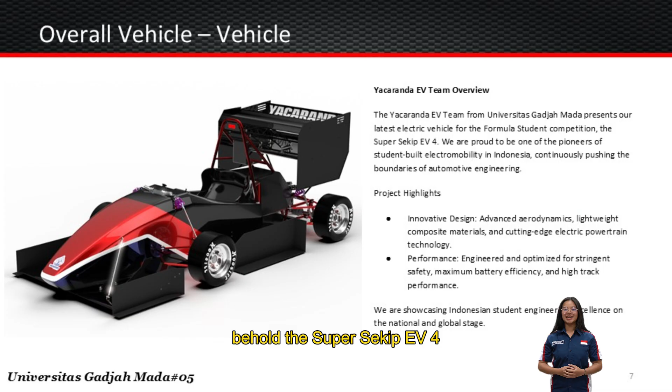Let's begin with the overall vehicle overview. Behold, the Super Sekip EV 4. Our design language prioritizes an aggressive aerodynamic profile paired with a 40 to 60 mass distribution to ensure maximum rear traction. Form strictly follows function here.

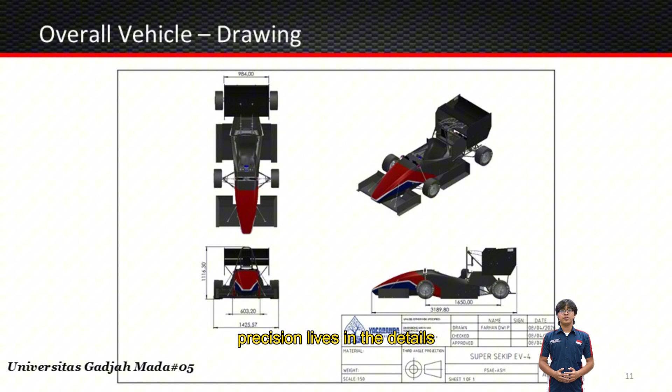Precision lives in the details. These drawings illustrate our tight packaging, achieving a 240 kg total mass with a center of gravity of just 283 mm, with balanced compactness with ease of service, essential for trackside reliability.

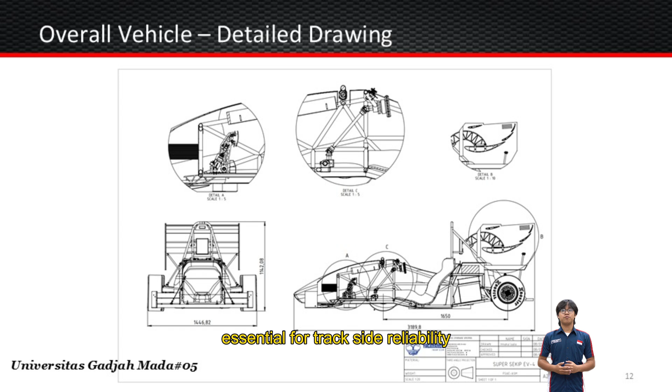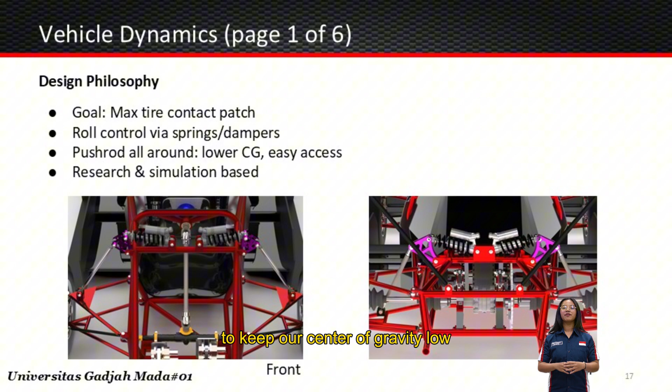In vehicle dynamics, our philosophy is simple: maintain the maximum tire contact patch at all costs. We utilize a full push rod system to keep our center of gravity low while providing easy tuning access for our engineers. Tire selection was driven by TTC data. We choose the Hoosier 16 by 7.5-10 LC0 for its rapid thermal activation. With a 1,650 mm wheelbase, we've hit the sweet spot between agility in tight slaloms and stability in high-speed corners.

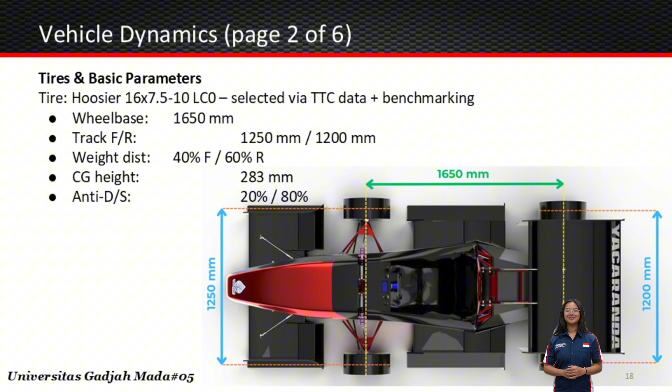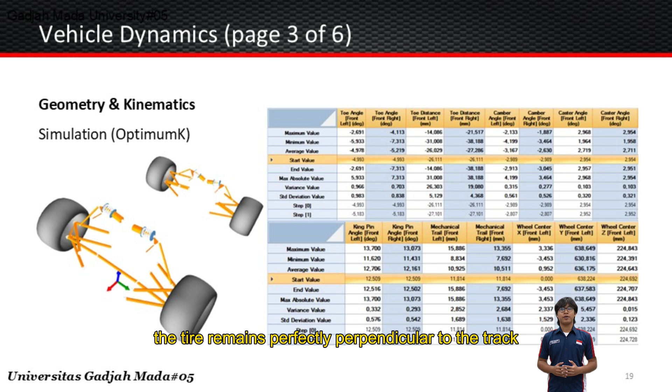Kinematics were refined through hundreds of OptimumK iterations. We achieved a minus 3.1 degree camber gain during roll, ensuring that even under extreme lateral loads, the tire remains perfectly perpendicular to the track.

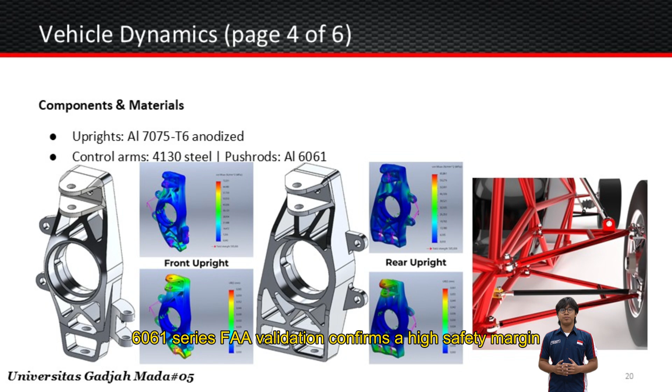For our uprights, we moved beyond standard aluminum to Al 7075-T6. This aircraft-grade alloy offers nearly double the yield strength of the 6061 series. FEA validation confirms a high safety margin even under 3G braking loads.

Suspension control is managed by DNM-RCP2S dampers. By matching our spring weight, 250 pounds in the front and 300 pounds in the rear, to our frequency targets, we've eliminated excessive pitching during aggressive transitions.

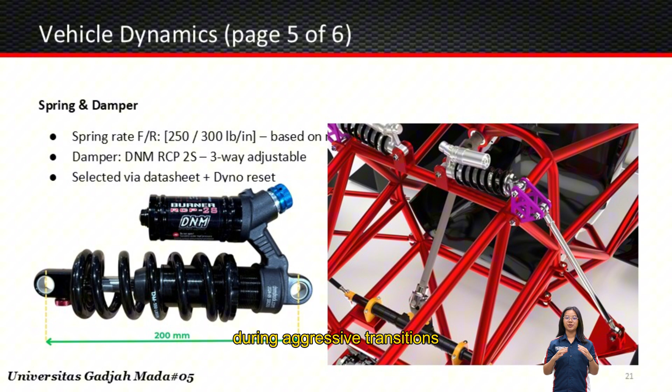Finally, the steering system. We've integrated a 2 U-joint column to prevent intrusion during impact, while the 155 mm wheel was ergonomically mapped using RULA analysis to ensure the driver remains in total control.

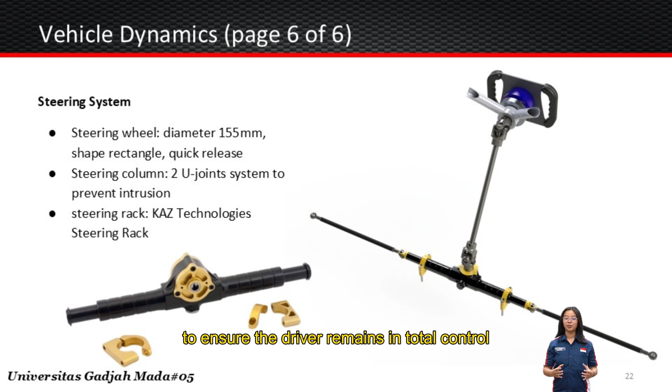The aerodynamic strategy for the EV4 is defined by 3 high-performance zones. Our front wing generates 297 newtons of downforce to ensure front end bite, while the side wings and the high-element rear wing contribute 381 and 343 newtons respectively, creating a balanced and stable platform.

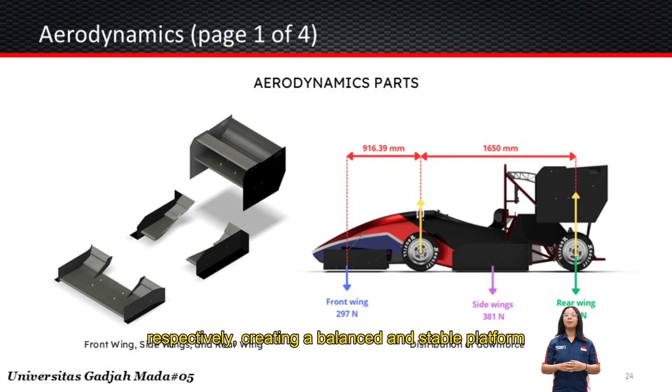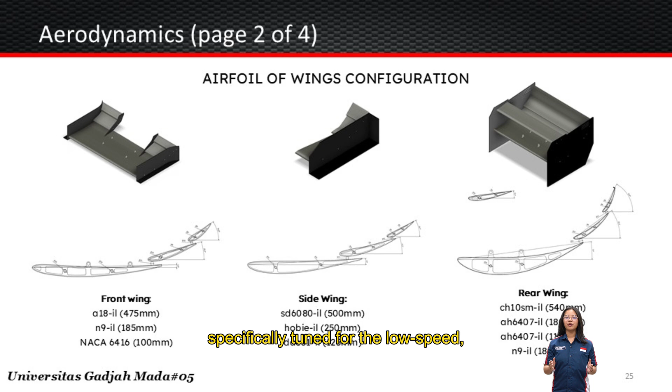For our airfoil configuration, we prioritize a proportional geometry that balances downforce with drag efficiency. By using these profiles, we achieve an optimized lift-to-drag ratio specifically tuned for the low-speed, high-chamber demands of the FSAE track. Our CFD simulations at 80 km per hour validate this design.

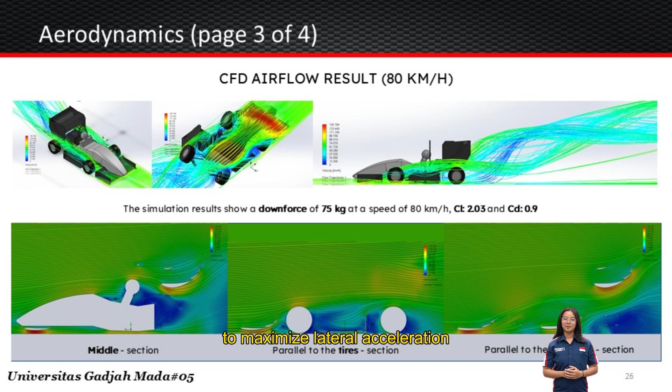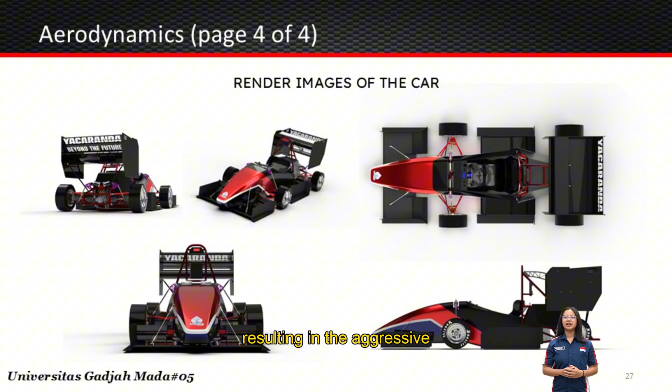Our powertrain philosophy prioritizes high power density. We selected the Emrax 228 MV motor, which delivers 75 kW of continuous power and 124 kW at peak, all within a compact 12.3 kg package. Its efficiency map is perfectly aligned with our target operating RPMs.

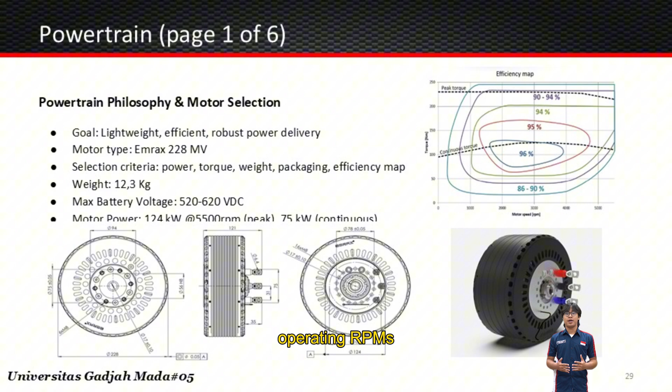To translate this torque to the ground, we utilize a 3.85 to 1 chain reduction paired with a Drexler FSAE V2 limited slip differential. The setup optimizes traction and allows the EV4 to reach a calculated top speed of 129 km per hour, ensuring we are competitive on all track layouts.

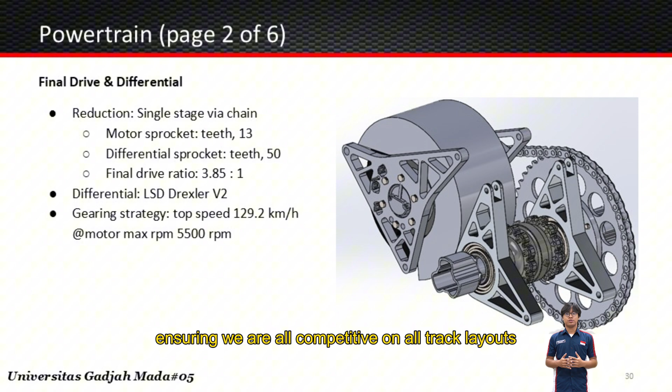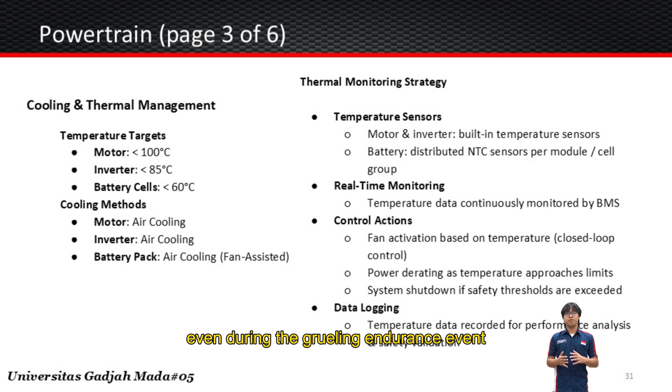Thermal management is key for reliability. We implemented a fan-assisted air cooling system for the motor, inverter, and battery pack. By monitoring real-time NTC sensor data, our BMS ensures all components stay within safe temperature envelopes even during the grueling endurance event.

Durability meets weight reduction in our material selection. We use high-strength 4340 steel for the shaft and 6061-T6 aluminum for the housing. Lubrication is managed with GL5 gear oil and NLGI grade 3 grease to minimize frictional losses across the drivetrain.

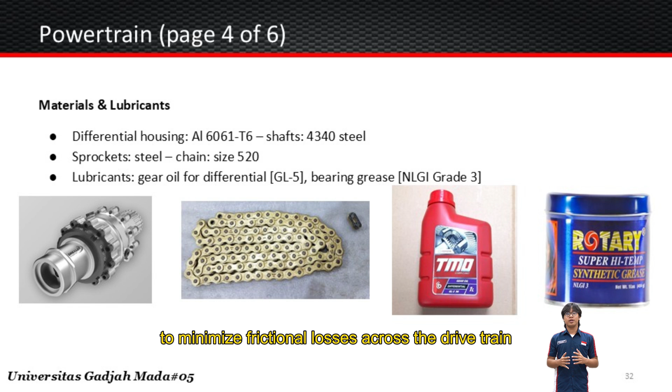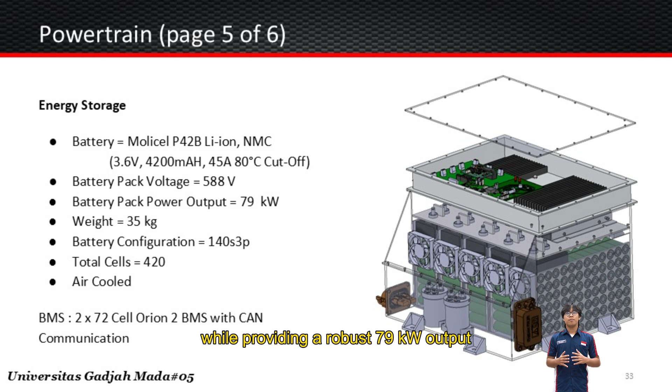Our energy storage utilizes a 140S3P configuration of Molicel P42B cells, providing a nominal 588 volts and 6.35 kilowatt-hour capacity. This high-voltage architecture allows for reduced current draw, minimizing heat generation while providing a robust 79 kilowatt output.

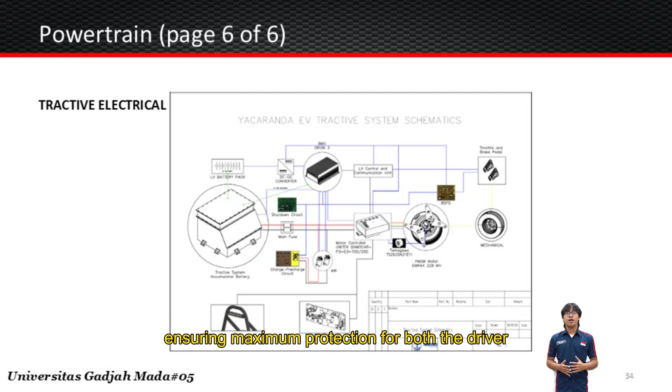Our tractive system schematic demonstrates full compliance with safety standards, from the AIR to the pre-charge and discharge circuits. Every element is designed for fail-safe operation, ensuring maximum protection for both the driver and the vehicle's electrical integrity.

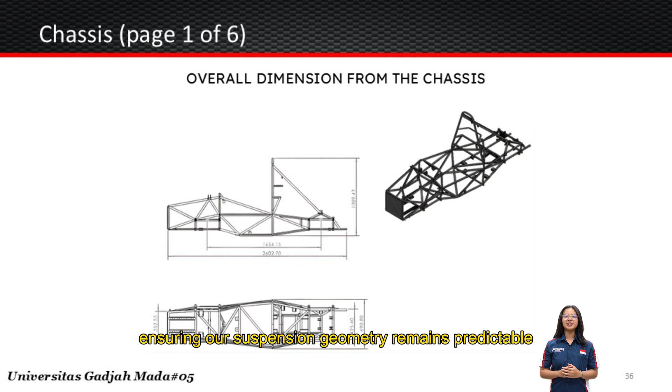The EV4 chassis is a tubular space frame optimized for structural integrity and mass distribution. Our primary objective was to create a rigid platform that minimizes elastic deformation, ensuring our suspension geometry remains predictable under high lateral loads. We selected STKM11A steel tubing for its high yield strength and excellent manufacturability.

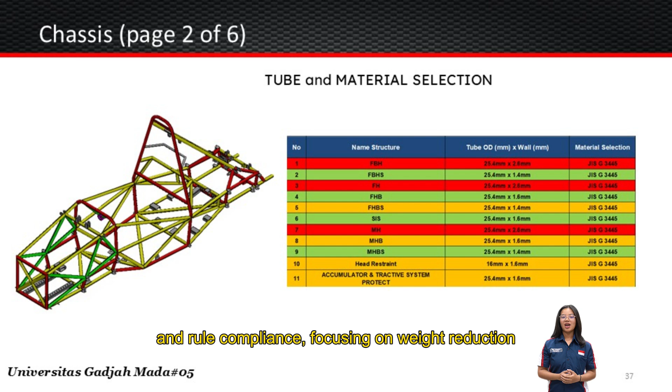Each tube's thickness and diameter were determined by load path analysis and rule compliance, focusing on weight reduction without sacrificing the safety cell's robustness. To validate our design, we performed extensive torsional rigidity simulations.

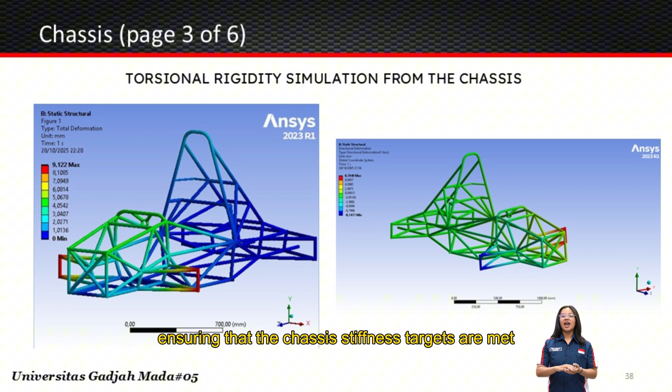The frame was constrained at the rear and loaded at the front to measure angular deflection, ensuring that the chassis stiffness targets are met for optimal handling performance.

Safety is paramount. Impact simulations for front, side, and rear scenarios demonstrate our chassis' ability to absorb and dissipate energy effectively. This test confirmed that the EV4 exceeds FSAE safety regulations for driver protection in all collision scenarios.

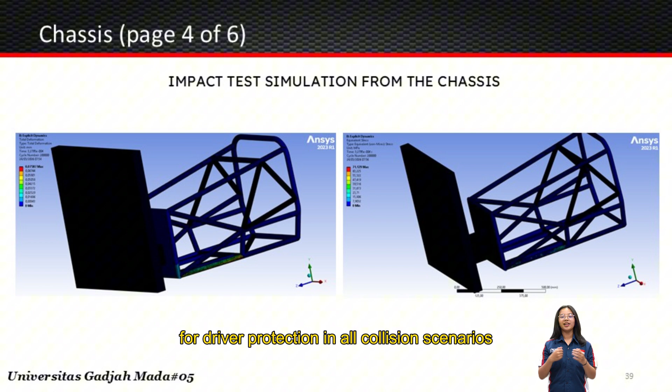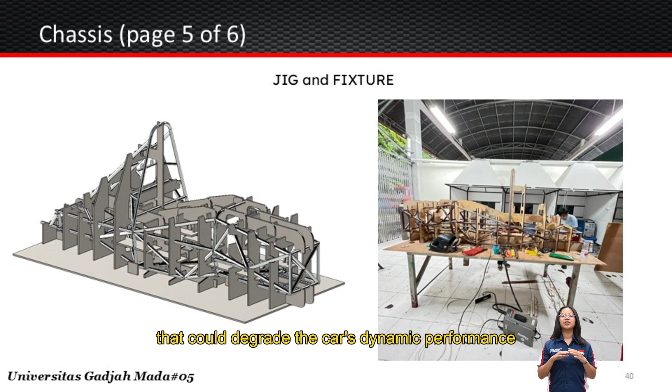Accuracy in manufacturing is guaranteed by our modular jigging system. This ensures that every node and suspension pickup point is perfectly aligned within a 0.5mm tolerance, preventing any misalignment that could degrade the car's dynamic performance.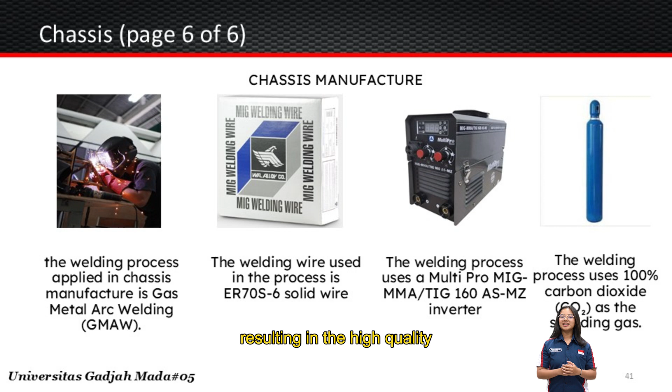Finally, we utilize GMAW welding with ER70S-6 wire for robust joint strength. Our controlled manufacturing process includes pre-weld fitment checks and post-weld inspections, resulting in the high-quality, race-ready frame you see before you today. Moving to the cockpit, our ergonomics design focuses on driver centricity.

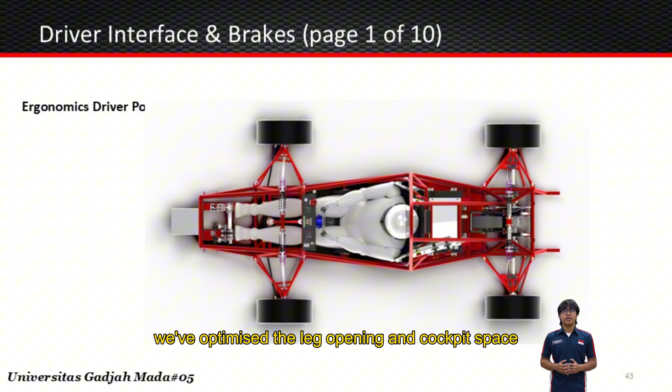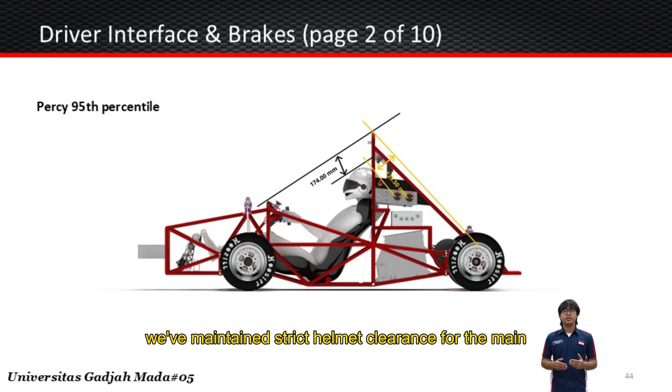We've optimized the leg opening and cockpit space to ensure the driver is not just seated, but integrated into the vehicle's chassis. To ensure safety and comfort for all, we validated our design using a 95th percentile driver model. We've maintained strict helmet clearance for the main hoop and braces, exceeding the safety regulations.

Precision meets comfort in our adjustable pedal box. It features a fore-aft adjustment mechanism and a dedicated heel support box, reducing driver fatigue during high-G braking and acceleration. Control accessibility is paramount.

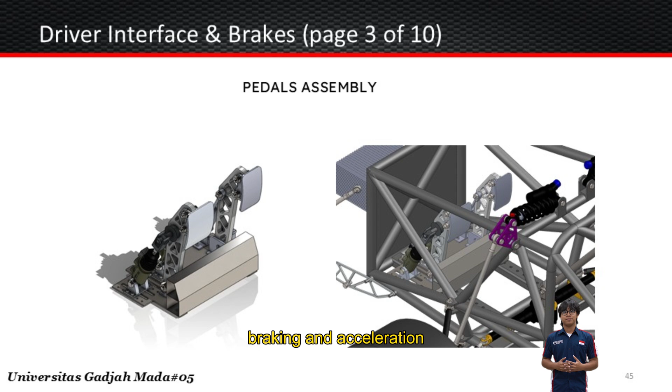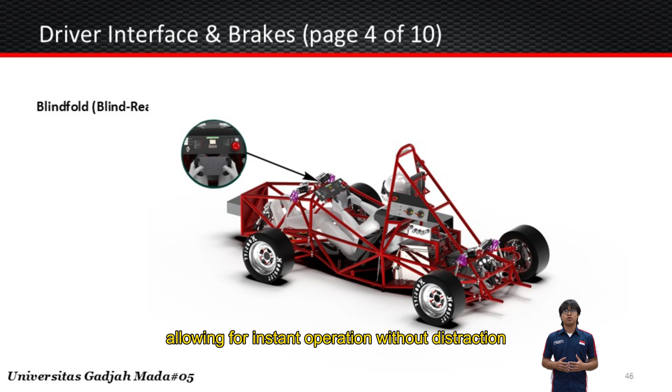We utilize blind-reach ergonomics, ensuring every critical switch is within the driver's natural line of sight and reach, allowing for instant operation without distraction. Visibility is a key performance factor. Our design eliminates blind spots, providing a wide field of vision that allows the driver to hit every apex with confidence and absolute spatial awareness.

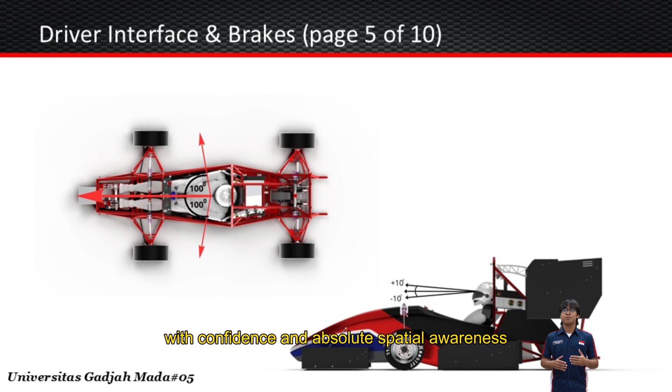Our braking system is engineered for 1G of deceleration with 400 newtons of pedal force. It features a dual circuit system with OBP master cylinders and Wilwood calipers, offering a 55 to 45 adjustable bias.

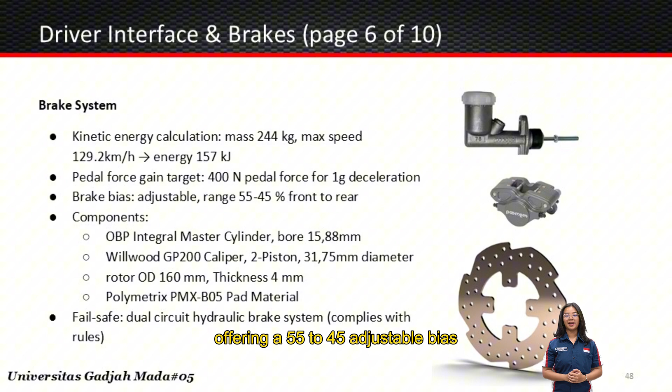Safety is never a compromise. Our vehicle includes a 6-point harness and impact padding that exceeds minimum requirements, backed by a dual-circuit hydraulic fail-safe for maximum reliability.

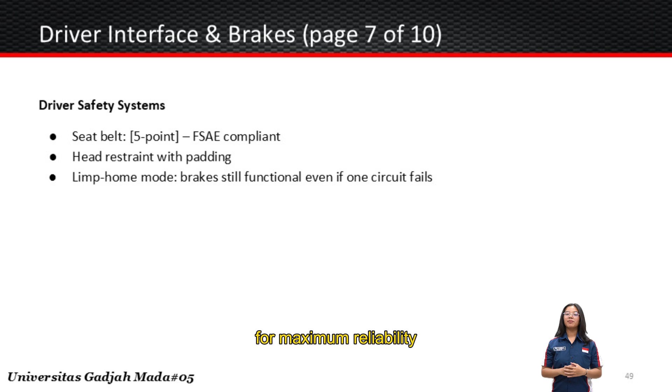We utilize an OMP 5-point racing harness, FIA 8853 certified, attached via 5/16 of an inch bolts to the chassis. It features a single hand rotary release mechanism, fully compliant with FSAE standards.

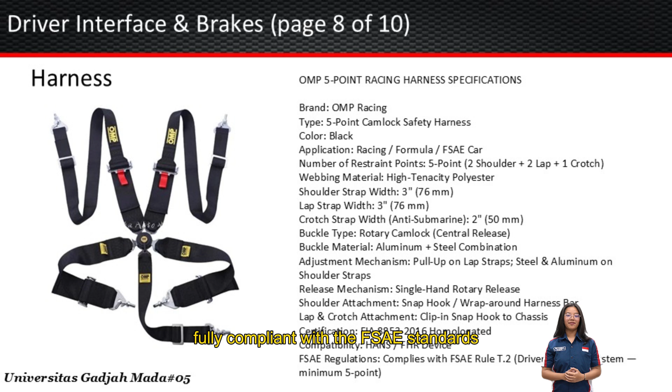For head protection, we use Confor CF45 foam. This 50mm padding is specifically selected for its high energy absorption during impacts, providing both comfort and a critical safety barrier.

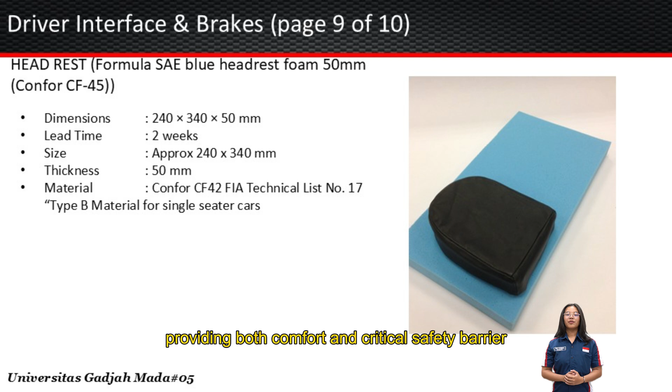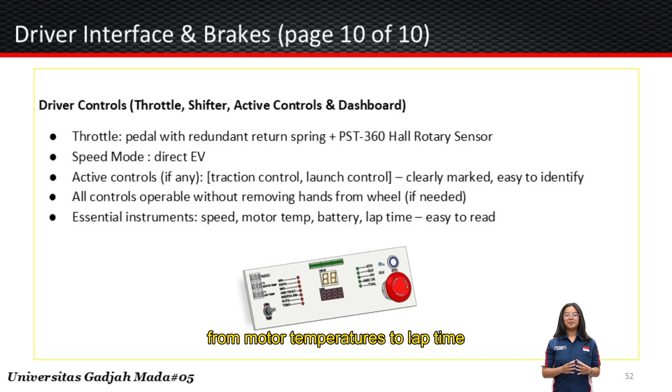Finally, the driver interface. Our dashboard provides real-time data, from motor temperatures to lap time, all manageable via intuitive controls right at the driver's fingertips. Our low-voltage architecture is the brain of the car.

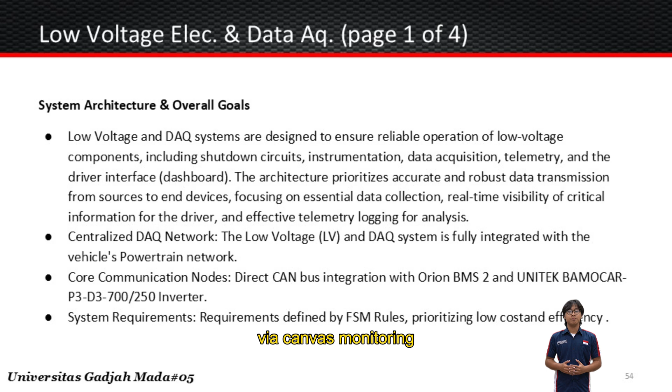It centralizes data from the BMS and inverter via CAN-bus, monitoring everything from cell temperatures to pedal positions in real time. To power the 25.9-volt GLV battery system, we use buck converters for stable 5 and 12-volt rails, efficiently

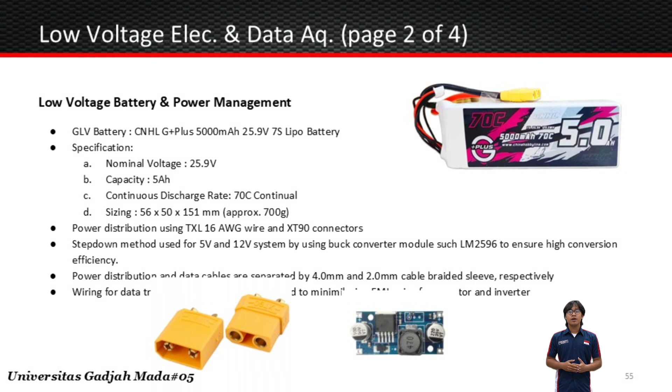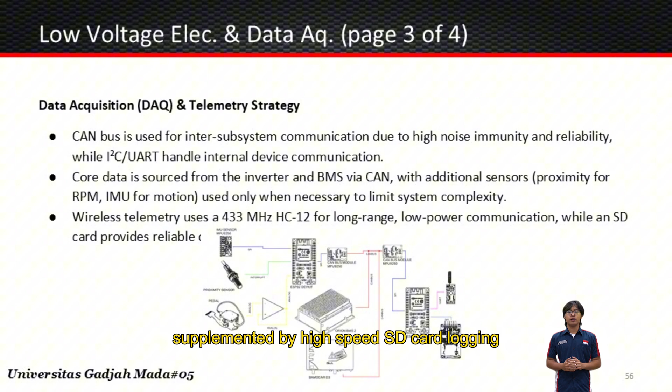managing loads like cooling fans while maintaining total system protection. Our telemetry strategy combines reliability with range. We use 433 MHz HC12 modules for long-range wireless monitoring, supplemented by high-speed SD card logging for deep post-session analysis.

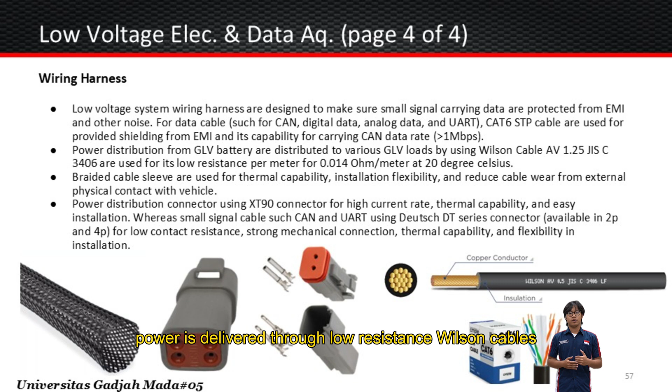To protect our data, we use shielded Cat6 STP cables to eliminate EMI. Power is delivered through low resistance Wilson cables with Deutsch DT connectors, ensuring robust connections in racing conditions.